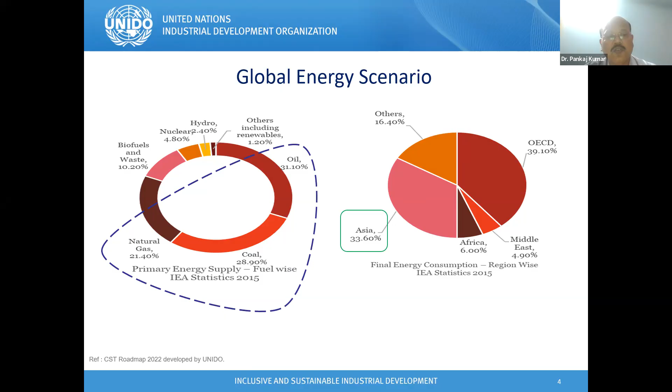Even looking at Asia, Africa, Middle East, OECD, and other regions, you can see the energy consumption patterns. Even from the Asia perspective, 33% of energy is used through natural gas, coal, and oil, along with other fuels.

And what are the factors? Because if we are using conventional fuel, like coal or diesel, every fuel that is produced affects the environment, because CO2 abatement is a very major prospect of concern for countries, and we need to look at how to reduce these things.

If industries are using coal, as you know, there are limitations to all these fuels, and there are options to look for alternative fuels, maybe waste heat recovery, or maybe solar power.

So rightly, as you know, if we talk about solar, there are two concepts we understand: electricity as well as heating, which come through solar photovoltaic and also through the thermal process.

If we are talking about the thermal process, industries are the major concern, which use process heating, cooling, and some other applications, because wastewater treatment is also a major concern. So I'm just trying to cover the factors of thermal heat. I will share all the information concerning heating in industries for different applications, as opposed to electricity, like solar photovoltaic, which is used for electricity.

If you're trying to compare concern to the industries, not for the residential point of view, compared to the industries for thermal efficiencies, of course thermal is a major hold for the efficiencies for the industrial point of view.

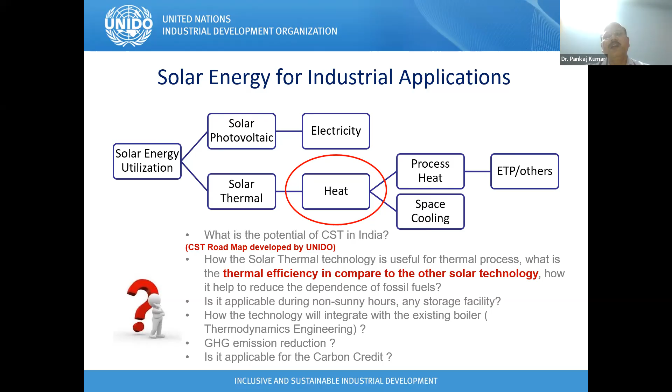Is it applicable for the carbon credit? Because we are talking about carbon credit - what is a carbon credit? It's ultimately linked up with greenhouse gas emissions, either using solar photovoltaic, solar thermal, or energy efficiency technologies.

So all the things which link up with greenhouse gas emissions or reduce CO2 abatement. I'm just trying to cover solar process heating, because as you know we understand the electricity point of view, even the 4 vertical components: industries, transport, residential, and others. We try to cover all the industries - you can try to see 26% which use electricity, and 74% is a very major point we need to think about.

74% is used for heating applications. So if they are using heating applications, you can try to see coal, natural gas, oil, and some other fuel, which totally depend on conventional fuel for the thermal process. So we need to think about how we can integrate and give proper solutions using concentrating solar thermal technology.

And if you are looking at the 74% of energy, it's important to categorize it in 3 ways, because in the industries there are 3 temperature ranges: low temperatures, low-medium temperatures, or high temperatures. If we are talking about high temperatures, that's for power generation, which we call CSP, concentrating solar power.

If we are looking at low-medium temperatures, CST is applicable. CST is the technology which can easily achieve temperatures of 200 to 250 degrees, because for process heating in industries, they are not asking for temperatures more than 200 degree centigrade. So CST is comfortable to integrate with a boiler.

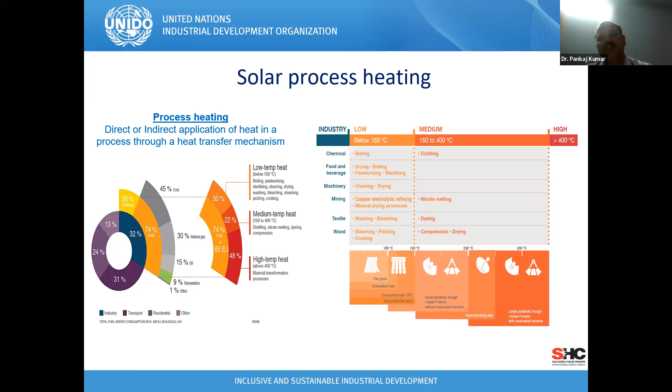Because if you are talking about high temperature, the technology available is concentrating solar power, which generates steam using a turbine to produce electricity.

From India's point of view, for the installations - if we're talking about CST, or the solar water heating systems - we've already achieved more than 15 million square meters of collector area installed to date.

If we're talking about concentrating solar thermal technology, this is very important. We need to look at how we can generate awareness among industries so that the technology will be adopted. Solar water heating is already proven technology.

The CSTs are still looking at it from the industry's point of view. They can try to adopt it for reducing coal use, because as you know, the cost and availability of coal is very important. Right now CST has 75,000 square meters of collector area installed in India - this figure is from 2017.

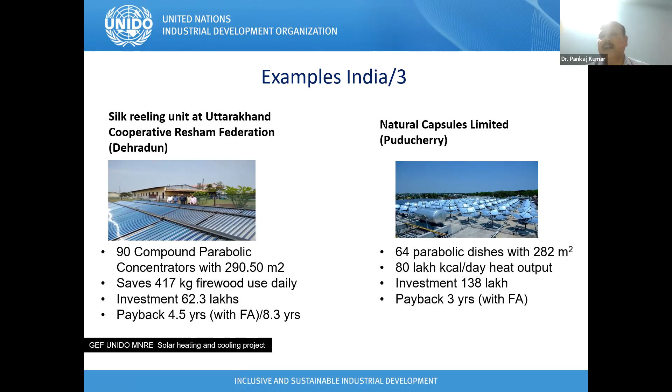The second advantage of this technology, in Natural Capsules Limited, is that they installed the system on the rooftop, and during summers when cooling electricity load goes very high, they use CST to cover it and reduce the electricity load by around 10 to 15%. This is the second advantage in the pharmaceutical sector.

Benefits include reduction of energy use and cost, risk reduction in fuel storage and use, and GHG emissions. Advantages of the technology include decarbonization of heating energy, thermal energy storage, low operation, and negligible maintenance.

Cleaning of collectors is important. We need to think about how to periodically clean the collectors so we can capture more heat. Because dust is a major issue, we need to think about how to maintain the systems very easily.

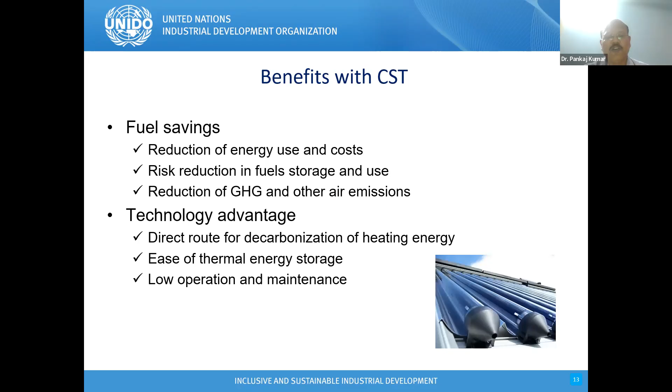Now coming to solar radiation, because the technology is directly dependent on radiation. If the radiation is low, we need to think about the selection of technology. In India, the radiation available is 3.5 to 4.5, or very close to 5 kilowatt hour per meter square per day, and the technology works very easily where the radiation is very good.

But as concerned to the northern eastern regions, the DNI is a major important factor. So we need to think about which technology is better for selection. This is the challenge of our project: how we can try to pitch the technology in the northern eastern area, because right now in CST technology there is a challenge.

The industries are very keen to adopt the technology, but the important thing is the payback period, because the radiation and energy generation with respect to the technology are very important. So we need to think about the thermodynamics, energy and process engineering. We are working very closely with the tea industries, and we need to think about how we can try to adopt and install the systems very soon.

Even in the Gujarat area or southern regions, the radiations are very good, and industries are now aware and understand the technology. They are looking for options that can be easily maintained by boiler operators and other trained people.

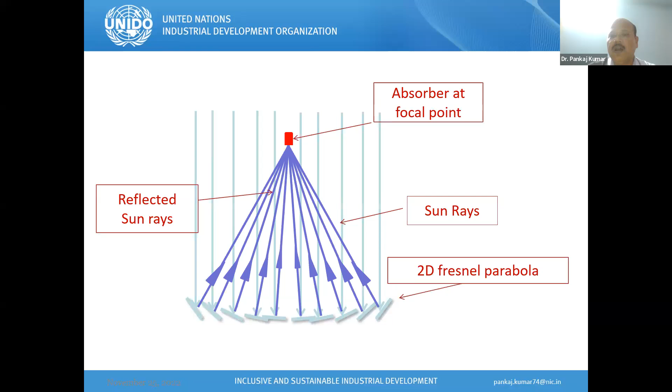If we look at the red block, you can see it concentrates on one particular point, generating heat or steam. It's a small boiler which concentrates on one point through reflectors, generating steam at temperatures up to 180 or 200 degrees based on the capability of the technology. This is the tracking mechanism, so they can capture more heat during sun tracking.

The important thing is that when we capture more heat, it is directly linked to cost economics. Whatever the energy demand is and what is captured through CST is directly linked to reducing the fuel used for steam generation, whether coal, diesel, or other fuels. Now I'll move to the types of technology.

You can see we have 6 technologies available worldwide.

We are talking about the characteristics of the technology. All the technologies have different characteristics because the optical efficiencies are different for different technologies. If we talk about the parabolic trough, it's available, but parabolic trough is also useful for power generation. But if you're talking about heating, for process heating, we need to think about the energy demand and whether it's applicable for some other technology with respect to cost economics. So the assessment is very important, and selection of the technology is very important.

Scheffler dishes are also important. Third is the linear Fresnel reflectors, paraboloid dishes, compound parabolic collectors. So we need to think about which technology is useful from the applications point of view. So this is the type of technology.

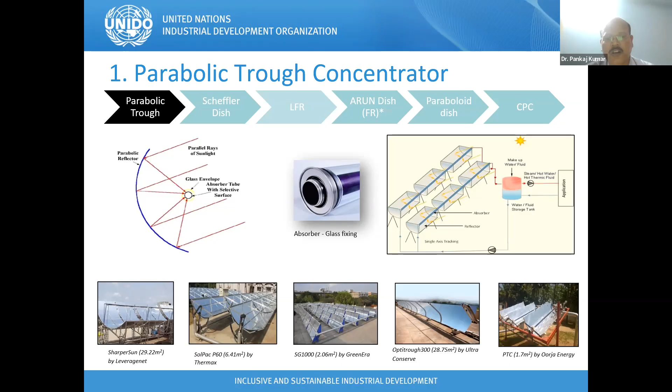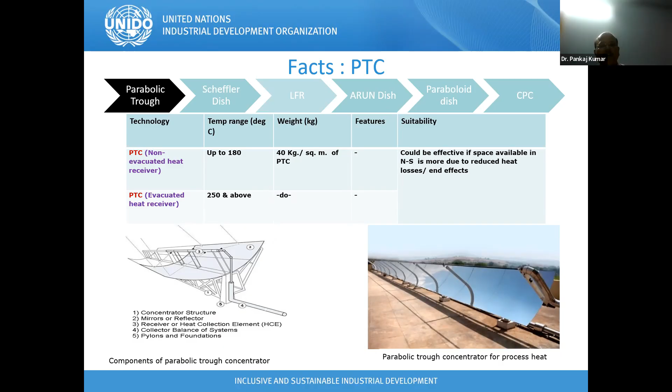We have the size of the parabolic trough, which is available from 2 square meters up to 30 square meters for the parabolic trough collectors. This is the fact sheet of temperature range, depending on whether we are using non-evacuated or evacuated heat receivers. We need to think about how much temperature we need using the parabolic troughs. Weight per square meter is different, so you can try to see. Suitability-wise, it's a single axis technology to capture more heat for process heating, as well as the compound parabolic collectors.

Now come to the Scheffler dishes. Scheffler is, of course, a German scientist, who invented the technology. If we talk about the shape, like parabolic trough, the shape is like an elliptical dish. We call it an elliptical dish, which they use for cooking applications. Mostly they are used for cooking applications.

But right now there is a successful case study using Scheffler dishes in the Brahmakumari ashram for power generation. The Brahmakumari ashram is one of the places which uses the same technology for cooking applications as well as power generation, and they generate more than 1 megawatt using the Scheffler dishes. So this is the right place - I think somebody should try to visit and see the performance and all the things.

The technology is still working, and for cooking applications, the technology which they installed in 1992 is still functioning because they take good care of it. So the maintenance point of view is very, very important. There is no need for higher investment cost of operation and maintenance, but people need to understand how to clean it, and how operators are trained is very important. So this is the Scheffler type of technology.

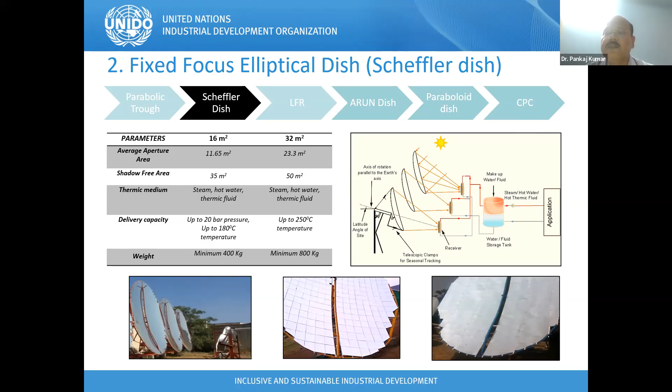The Scheffler dishes which they started are available in sizes from 6 square meters up to 60 square meters. In the Brahmakumari ashram, they installed a system of 7 square meters for cooking applications, and they already installed a 60 square meter system for power generation.

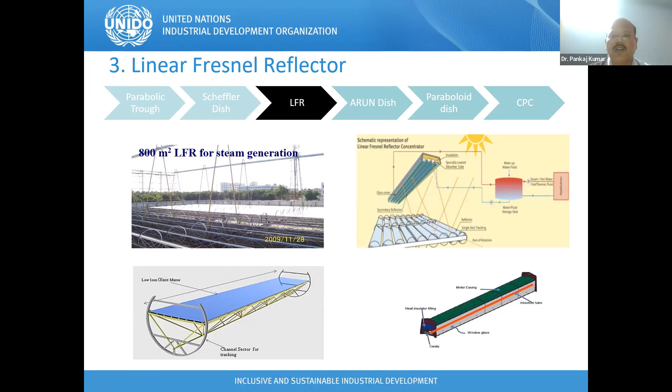This is a linear Fresnel reflector. This technology is especially used in the southern regions for desalination applications. In one of the manufacturers, they install systems for the desalination process. This is the fact sheet for linear Fresnel. Worldwide, this technology is used in the dairy sector also, and even in power generation.

Arun dish, the size of which is available from 30 to 160 square meters, is used in industries like NTPC Netra, where they installed a system for cooling applications. Even in Akshardham, they use a system for cooking applications, and Arun dishes are also installed in the dairy sector for pasteurization. So this technology is installed for various applications in different regions.

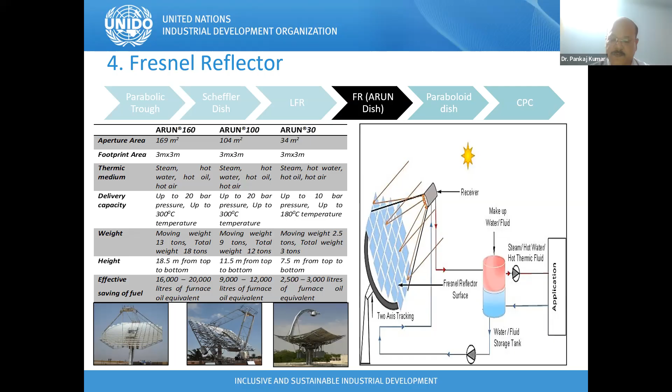Paraboloid dishes, the system installed in the dairy sectors, and the system installed in pharmaceuticals. The important thing is the tracking mechanisms, and you can see the beauty of the technology because paraboloid dishes are available in different types, as manufacturers develop different designs, and still the systems are functioning well. I already shared one case study for the paraboloid dishes installed in natural capsules.

Cylinder is a very small size collector, about 4 square meters. The total area installed in natural capsules is limited to 286 square meters, and still the systems are functioning well due to being easy to operate and maintain, both by the supplier and the end users. The system is also installed in pharmaceuticals and in the dairy sectors. This is a highly efficient technology which captures more heat compared to others.

For the Arun dishes, whether we're talking about 100 square meters or 169 square meters, the load is very important, and whether the system is installed on the rooftop or on the ground matters too. Where space is a major constraint, like in one example at ITC Maurya in Delhi, they don't have any space. So what is the beauty? They distribute the load, because the footprint area covers only 3 by 3 meters of collector area, but the dishes provide 100 square meters of collector area, and they installed systems for dairy applications at ITC Maurya.

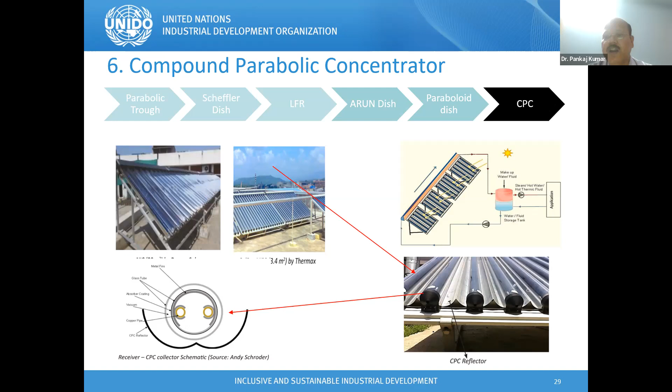Before that, I shared the parabolic trough collectors, because the technologies are the same, but you can see two regions, Rajasthan and Andhra Pradesh, which use them the same way for cooling applications, though the size of the systems differs due to radiation levels. At NPCIL in Rajasthan, at the power atomic centers, they use 650 square meters, but Honeywell uses 800 square meters, due to differences in radiation and cost investment.

I just shared that compound parabolic collectors are already matured, but right now the technology has advanced and is more efficient in terms of heat generation. If we talk about cross compound parabolic collectors, right now the technology is very highly efficient. The cost is low compared to other technologies, and they're used in various applications because industries are looking for more heat generation. If we can provide more than 90-degree temperatures, they are very happy.

Systems have been installed in UAE for desalination purposes, and right now in India, the growth of these technologies for installations is increasing very fast. For example, in wastewater treatment, they are generating 1.5 tons per hour of steam using CPC technology. If we're talking about regular CPC, it will not generate steam, but if we're talking about cross compound parabolic collectors, they do generate steam.

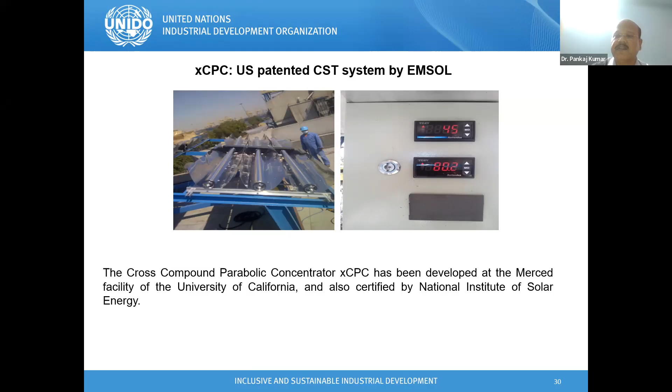The beauty of this technology is that it's already US patented, and they installed systems under the UNIDO project in Ranipet for wastewater treatment, generating 1.5 tons. I understand this is one of the biggest projects for wastewater treatment in Ranipet, covering close to 1700 square meters of area. That is how, under the industries, we understand the selection of technology and the cost economics.

Now let's come to the factors, because all the factors are linked up with the thermal efficiencies.

If you are talking from the efficiency point of view, latitude means places like that. For the northeastern region, the latitude is different. For Leh Ladakh, the latitude is different. So the ability to identify the place is very important to find out the right technology.

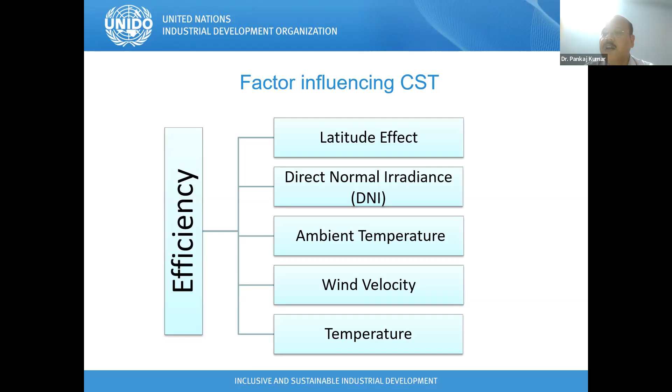DNI is very important, direct normal irradiance. Of course, some places also need to capture the diffuse radiations. Ambient temperature, wind velocity, and temperatures like that also matter.

Now coming to the point of industries, because industry will not allow you to touch the existing systems, since there are some procedures and protocols. But solar is one of the easiest ways to integrate with the existing systems.

Through the boilers, the systems function well because they have condensate heat recovery through the CST. Whatever energy they recover through the condensate, they can directly integrate with the solar instead of feed water tanks. In that way, they capture more heat and provide more heat in the thermal process before going to the boilers. So this reduces the thermal load.

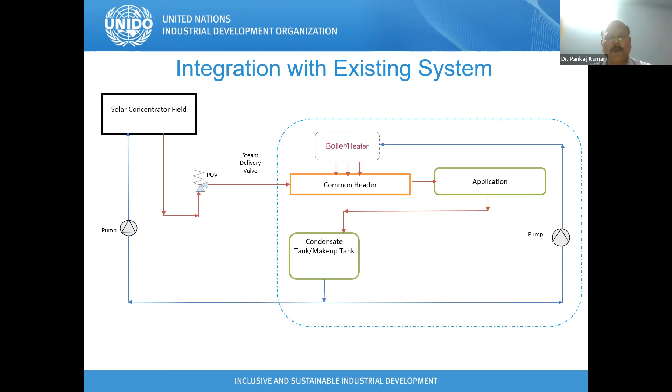Now coming to the cost benefit analysis. Of course, coal, biomass, oil, and natural gas are important for industries and institutions because they use various conventional fuels for different applications. So we need to think about solar CST.

Even concentrating solar thermal technology is one of the best options to provide temperatures of 50 to 250 degrees. Of course, we need to think about CO2 abatement, and from a financial point of view, we need to look for carbon credits for the industries.

For the investment point of view, this is a rough idea. I'm just sharing the cost economics. If we are talking about 100 square meters, it can go up to 5,000 square meters. But as an example, let's think about 100 square meters. The per square meter cost is 20,000, or maybe 25,000 per square meter of collector area.

So this will help reduce diesel as well as LPG and other conventional fuels. Accelerated depreciation benefit is also available. If they use CST technology, they can easily go for the accelerated depreciation benefit.

And of course, this is the cost economics ratio. The major important thing is the reflectors. Of course, the mirrors are very important. So instead of looking for plain mirrors, we recommend solar grade mirrors, so that the systems function for more than 15 to 20 years.

So the cost economics, selection of factors, and quality point of view are very, very important, so that the systems function not just 5 years, but up to 15 to 20 years. So for industries, they are very concerned about quality compared to institutions.

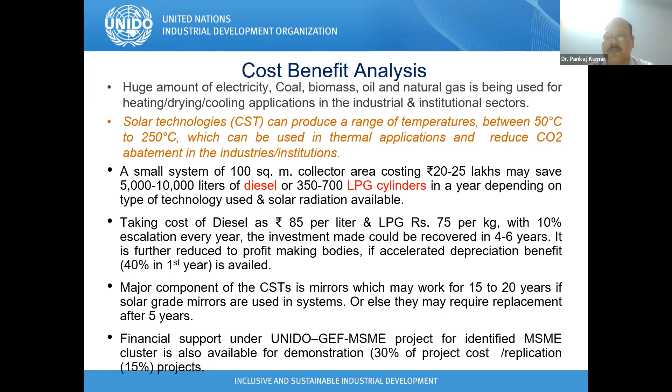Because process heating is the major chunk for industrial wastewater treatment, I'm trying to cover 2 or 3 slides on how industrial wastewater treatment is very important using CST.

Now, talking about ZLD, since industries are very prominent for decarbonization, for example, a few leather industries or textile units are very prompt in looking for ZLD solutions.

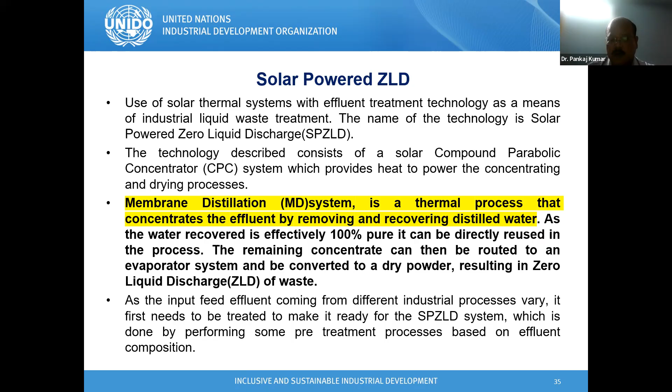CST is applicable using different technologies. My concern is, as they are using membrane distillation, it's very easy to integrate with CST to give a complete solution, and they can try to run at least 6 to 7 hours of conventional load using this, for some ZLD process applications.

This is a major chunk, so I won't go into details since everybody understands industrial wastewater and how we can try to reduce it and see the options. We can think about capturing more performance data for wastewater in other places like Ranipet, and definitely we will share that with all the industries, so they can see how CST will work in terms of wastewater treatment.

As concerned to the water crisis, of course, the major issues are in Chennai, Bangalore, Delhi. This is the major issue of the groundwater. So we need to think about the desalination process. One area in Vellore has installed desalination using CPC technology for desalination applications. We need to think about other countries, South Africa or others, because even with the water crisis, there is a possibility to look for fresh water through desalination using CST.

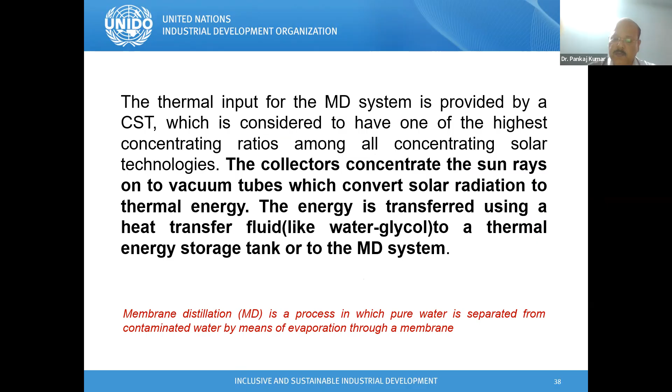And the technologies are very easy to integrate with the MD system, and our suppliers are very active, so they can work effectively to integrate with the membrane-based distillation process using CST.

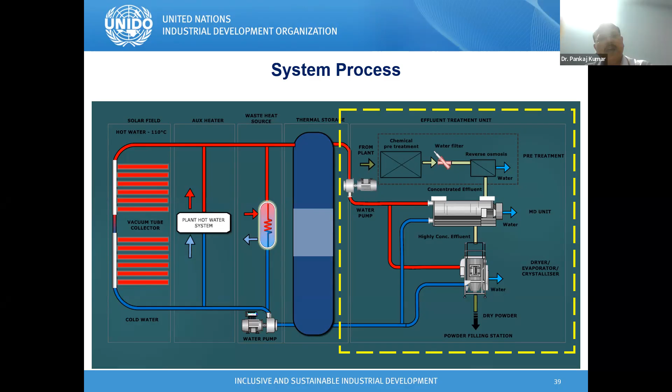You can see the three vertical components: the solar plant, thermal storage, and existing systems. The important thing is they are not allowed to enter the wastewater treatment directly. Using the heat exchanger, whatever energy they capture through the existing systems, they can capture more heat using CST technology, and if they capture more heat, they can go for thermal storage too.

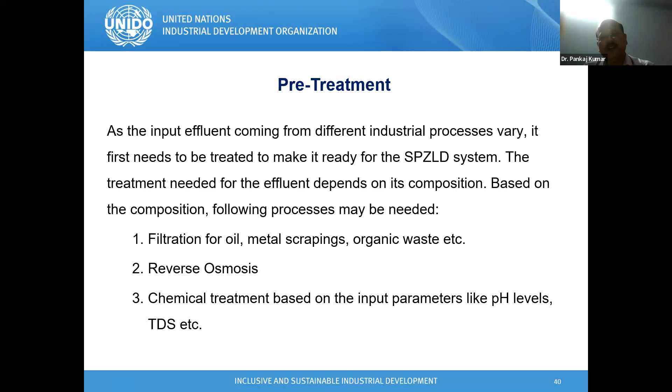The important point is the pre-treatment, as effluent treatment coming from different industrial processes varies. It first needs to be treated because we need to think about scaling of the technology, otherwise it affects the solar technology. So we need to provide complete solutions either through the heat exchanger or some other way, maybe slight pre-treatment of the water using the heat exchanger. This is the process of effluent treatment, pre-treatment, and thermal energy storage through membrane distillation.

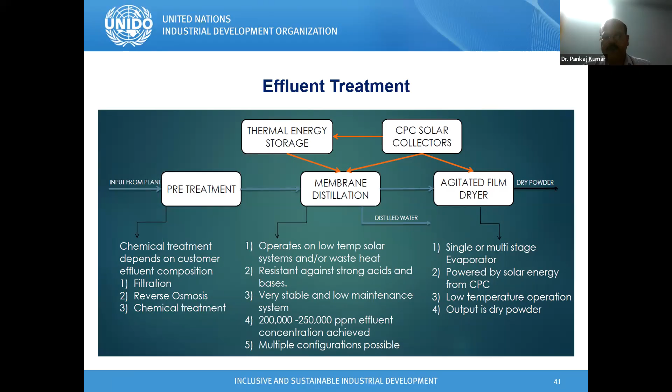I'm talking about CPC because, as you know, CPC is very easy to capture heat, like 80 to 90 degree temperatures. So instead of looking for high temperature, given the cost economics, CPC is comfortable to use for wastewater treatment. For the cost economics, if we look at triple effect operations and MD-based systems...

You can see in the yellow lines, the initial investment costs are going high like that. But in the future, the cost will come down, because the initial investment cost is high with respect to solar, but drastically the payback period, you can see the payback period is up to 20 years. Triple effect is increasing day to day, year wise. But if you are talking about waste heat through solar, it drastically comes down, and definitely in the future it's no investment cost.

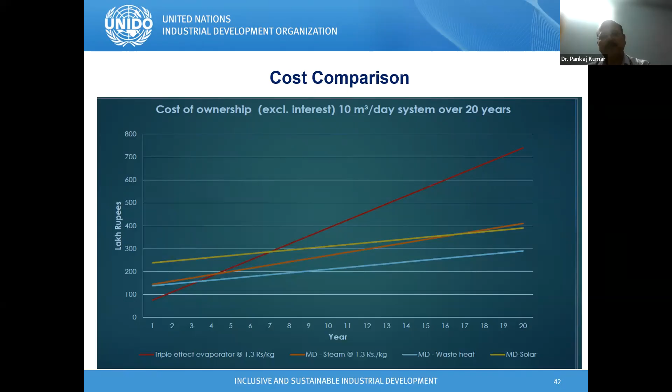My observations on using this, especially for wastewater, industrial wastewater treatment based on pollution potential and CETPs, are established for the highly polluting Red Category industries, such as tannery, textile, electroplating, chemical, and pharmaceuticals. They are thinking about this, and that is the way UNIDO is pitching to adopt the technology. Earlier we were trying to focus more on power, process heating, like steam generation for various applications. But from the thermodynamics point of view, whatever the energy demand, we need to fulfill it through CST, so process engineering is very, very important.

And that is the way we need to think about how we can provide training for the trainers, so that people understand and can give complete solutions, and in the future the systems don't fail. So the demand and meeting it are very important. In that regard, one of the technologies we are trying to install is RANIPET integration, supported by UNIDO. That is the way we need to think about helping other industries get a complete thermodynamic solution using CPC.

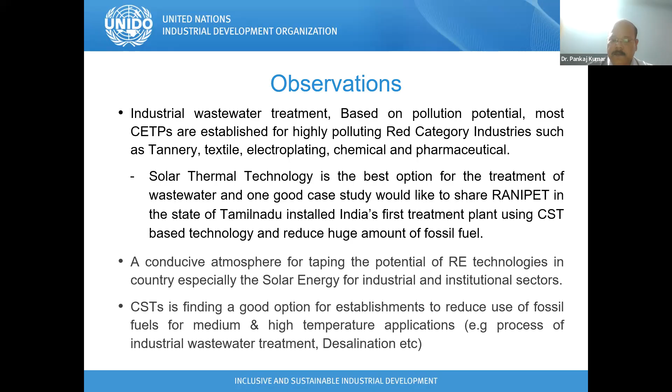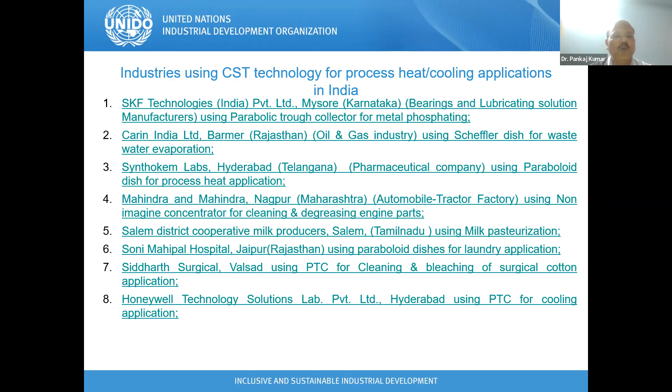So I'm not going into details, but the industries have come forward to support how we can capture more heat in terms of the generation of heat. This is a small case study for SKF.

They are using 256 square meters with a parabolic trough. The application is metal phosphating. They installed the system on the rooftop like that. So we are not saying space is the major issue.

If industries say space is the major concern, how can we adopt the technology? We have lots of case studies showing there is a possibility to use either a corrugated roof instead of an RCC structure. With respect to RCC structures, suppliers are trying to install on corrugated roofs. Distributed load is very important.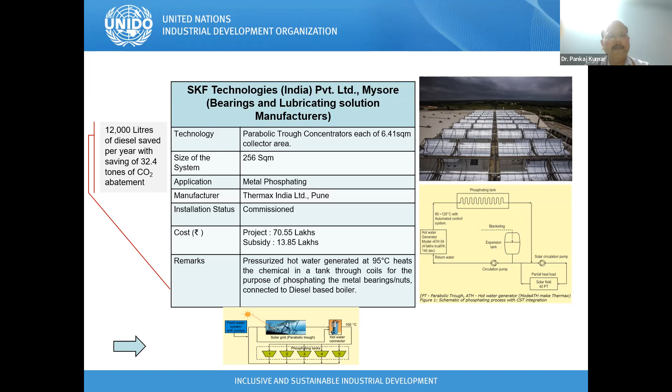India was the first to use this technology for water treatment and wastewater evaporation. But the important thing is we need highly efficient technology so that it will replicate more across other industries, and they are thinking to provide a complete solution instead of looking only at technical aspects.

So the selection of technology is very important. If we capture more heat, we will evaporate more wastewater. But the important thing is ultimately the payback period and investment cost.

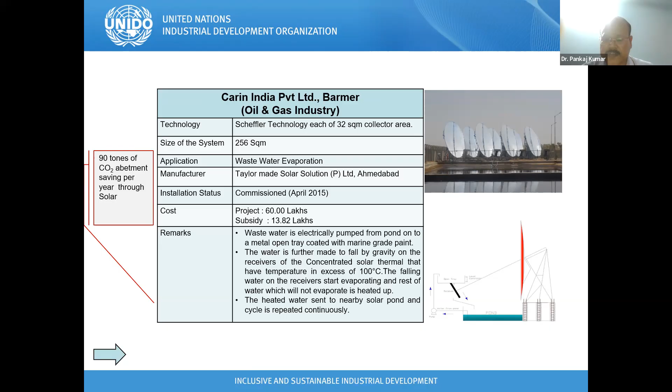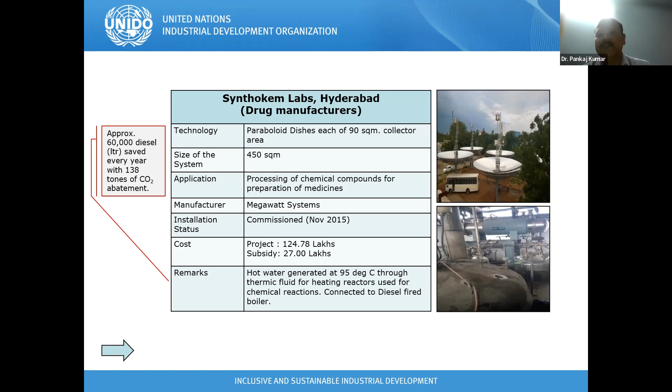Whatever technology is applicable based on space, we provide all the information, and they are trying to contact the industries. There is no need to look for additional benefits from the government; they are very keen and concerned about quality and demand.

My intent in sharing these photographs is that the system is easy to install on the rooftop or ground space, in some corner like that. But there is also a possibility to install on the rooftop if we distribute the load, and that is why I am considering this case study, so people understand the industries are supporting this. There is no big issue with space.

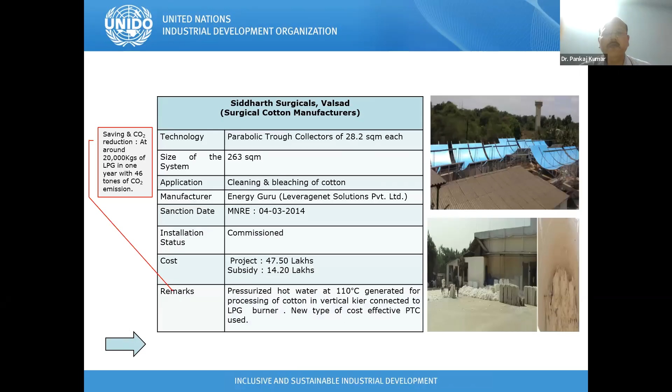This technology is used in two different places, Rajasthan and Andhra Pradesh. We see 800 square meters, and at NPTL they use 650 square meters. The changes in size are based on the availability of radiation. So assessment is very important, using ground radiation data instead of relying on satellite data.

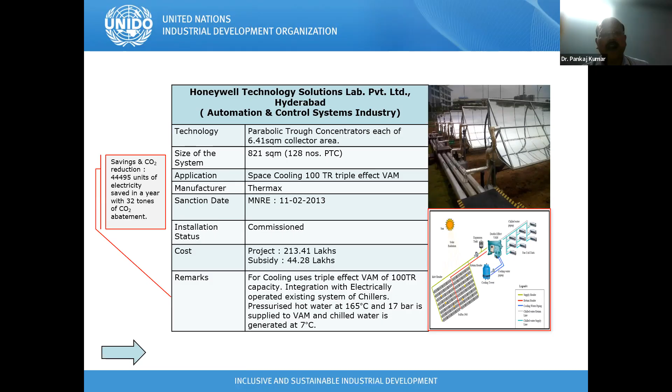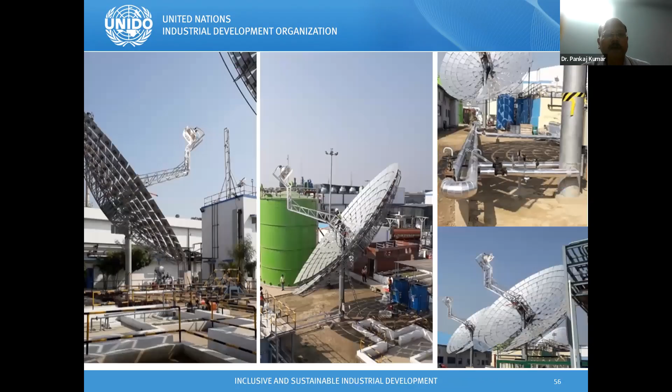This technology was installed in one system in Uttarakhand. You can see space is a major issue, but the technologies are still installed in some places, and the systems are functioning well, like the Lysol facility in Dehradun. This is a major constraint, yet the systems are functioning well.

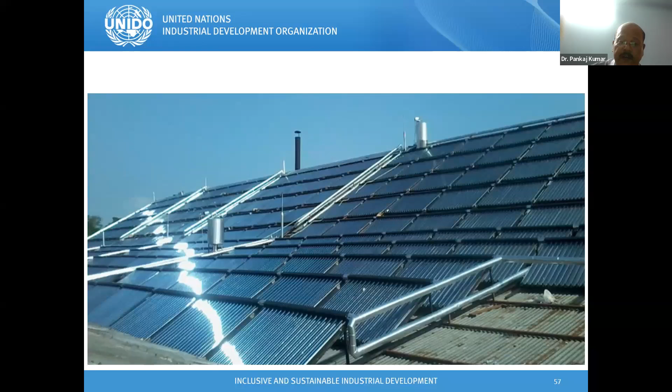You can see the corrugated roof where the system is installed in one of the industries, like a tea industry in the northeastern area.

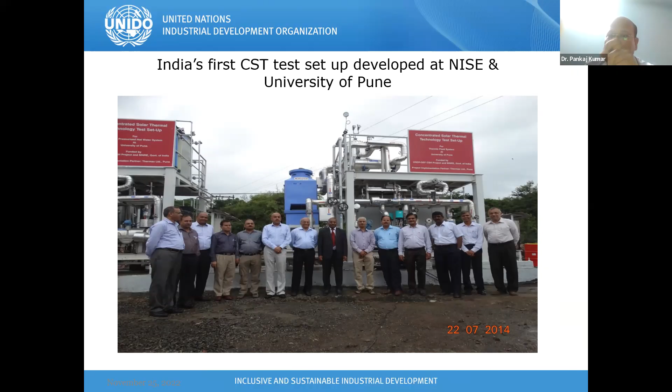This is the system where earlier we had solar water heating testing centers, but we established two test centers under UNDP programs with the help of the Ministry, at the University of Pune, and also at a center for solar energy, for testing CST technology including collectors and reflectors.

So my conclusion from this entire presentation is that there is a conducive atmosphere for tapping the potential of renewable energy technology.

Of course, in the country, especially for solar energy, for industrial and institutional sectors, whatever the applications required, the technologies are applicable and can be easily integrated with existing systems, either for cooking, process heating, cooling application. The technology is applicable for laundry and drying also.

Drying is a major constraint; some technologies used for drying in certain industries earlier relied on kerosene. Now they've replaced that, using CST technology for drying purposes. CST is finding good options for establishments to reduce use of fossil fuel.

Whatever energy we capture, we definitely try to reduce the boiler load, maybe for 6 to 7 hours, whatever peak load is available during the sunny hours. So this technology provides energy in terms of whatever is demanded during the sunny hour, but there's also a possibility to look for storage in terms of pressurized hot water.

I'm not talking about steam generation, because if you're talking about steam generation, the cost is a major issue. So if you're talking about power generation, of course molten salt and other things are being tried for storage.

But from a process point of view, there's a possibility to look for pressurized hot water storage tanks. I just shared one case, one example for the RK missions.

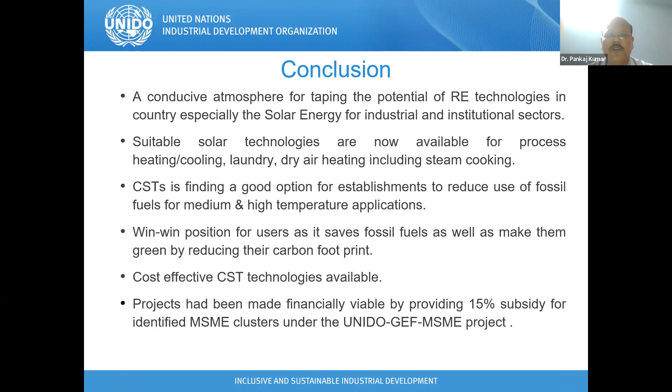And if you're talking about carbon footprint reduction, we definitely reduce conventional fuel use. It's cost effective, with financial support available for some clusters. So from my side, I've covered all the points, and I'm very happy if somebody wants to ask questions.

Thank you very much, Dr. Pankaj. Before I ask others to comment, I just want to say that I was aware about the technologies in Akshardham for cooking. Even in, I think, Maurya Sheraton, they have that Arun dish. Then of course we have the classical example we used to show of Mount Abu, the cooking there.

But today what I've seen is many more applications, and your focus has been on zero discharge, that solar power technology, solar thermal technology, zero discharge. Have you contacted CPCB? You showed one pilot plant on Ranipet in Tamil Nadu.

We are trying to share this major problem. The CETPs, you know, they are having very old technology. Their technology is very bad, and their discharge, you can say, I don't know. So have you contacted CPCB for taking it further?

CPCB, Pollution Control Board, right now, because as you know, the Tamil Nadu Water Investment Company is very close to interacting with some clusters in leather industries. Ranipet is one of the examples.

And they are thinking, because the system they already tested, the important thing is they are trying to replicate it. And in one case example where they installed the system, it's still being tested, because last month they installed the system, and we need to look for the performance data.